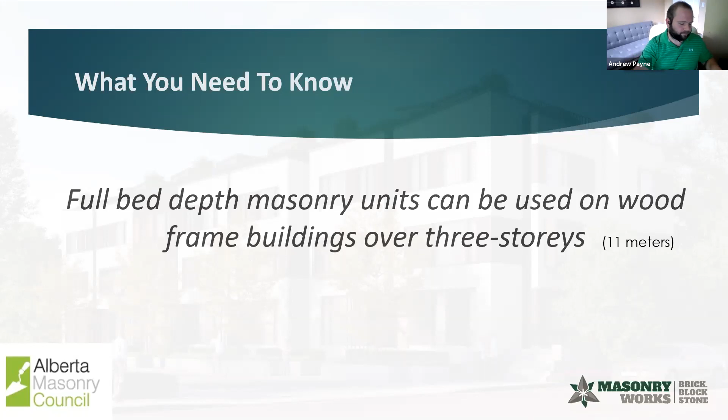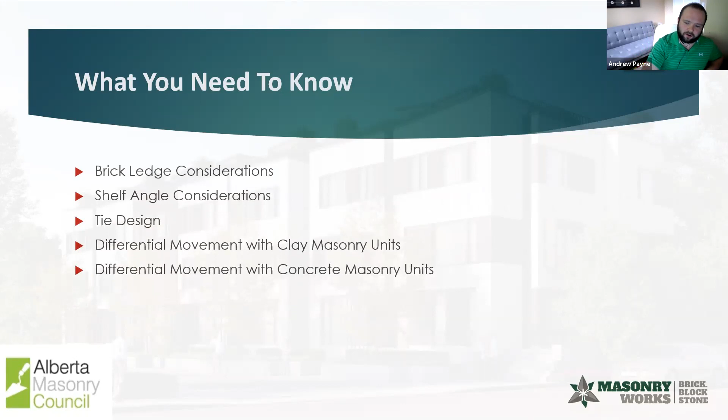In this presentation, we're going to go over the brick ledge considerations you need to know, shelf angle considerations, tie design, differential movement with clay masonry units, and differential movement with concrete masonry units. That's it. So we'll start off with brick ledge considerations.

Depending on what part of the country you're in, you may or may not see this as a common construction practice in your area. I know here in Ontario, we use brick ledges quite a lot—that's the common practice. You can see here a picture of a brick ledge, right at the foundation. I know in Western Canada that's not so much a common practice; it's more shelf angles at the foundation, but we'll talk about that as we go through the presentation.

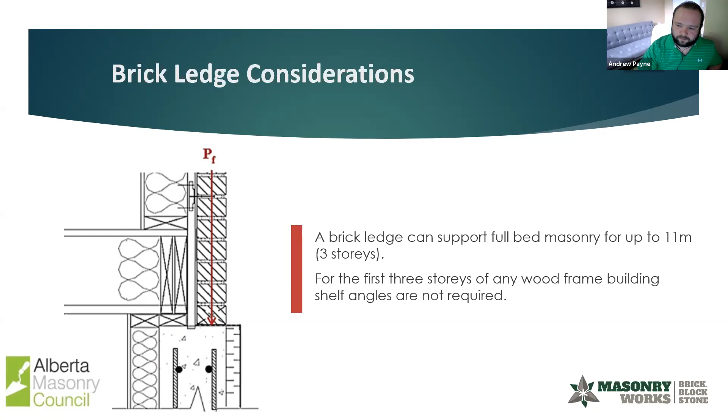If there is no concrete brick ledge, masonry can be supported by the shelf angle at the foundation level. The shelf angle is anchored into the concrete foundation, and then it goes up. If this method is used, a shelf angle is required at each story above the 3rd to support the masonry load and isolate differential movement.

The good thing about this method is it allows for continuous insulation below grade, below the foundation, to come through. Depending on what part of the country you're in and the energy codes you're subject to, this may be the method you have to use to meet NECB 2017 specifications. With a concrete brick ledge on the foundation, unfortunately, we don't have a way to have continuous insulation through that.

But in Ontario here, we're still on the NECB 2011, so we don't have to worry about that, at least in the status quo, but we know that's going to be changing. If you are watching from Ontario, make sure you are paying attention to the shelf angle at the foundation, because that could be coming down the pipe pretty soon.

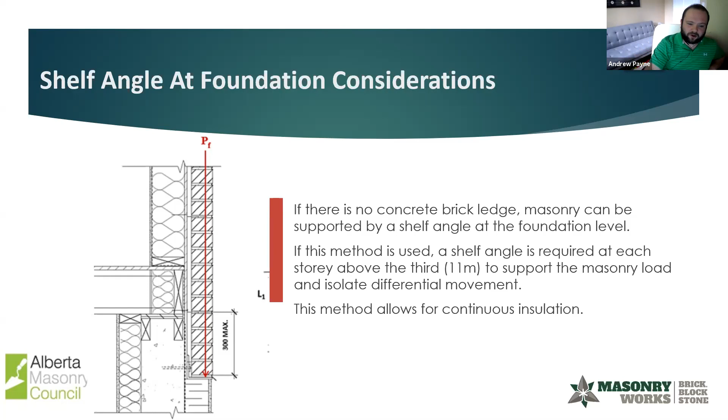The continuous insulation at the foundation kind of looks like this. I've got a clearer one here. This is continuous insulation at the foundation with a shelf angle, and it's consistent with NECB 2011. The only difference between the NECB 2011 and 2017 drawing is that insulation would continue below the foundation and below the shelf angle. Having that shelf angle allows that to happen. Out in Alberta, that's how they're going to be building on a go-forward basis.

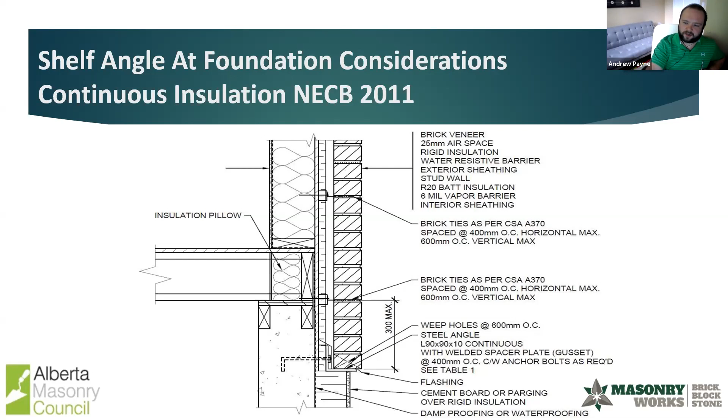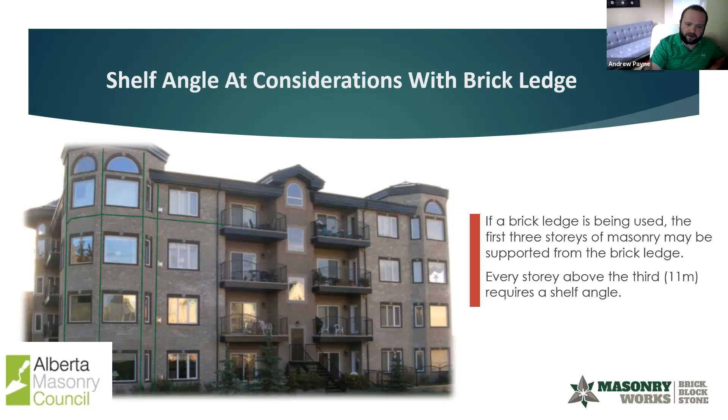Above the 3rd story, a shelf angle would be placed, and we'll get into movement joints later in the presentation. The shelf angle would be at the top of the 3rd story, supporting the 4th story. After that, every floor up to the 6th floor, to the maximum height you can go, requires a shelf angle. The spacing of the joints does change a bit after that, but just keep in mind, if there is a brick ledge, you can go the first 3 stories.

If a brick ledge is being used, the first 3 stories of masonry may be supported off of that ledge. Every story above the 3rd requires a shelf angle. This is a recap of how the drawing should look for a shelf angle supporting the 4th floor. You can see in this drawing that it's a through bolt supporting the shelf angle.

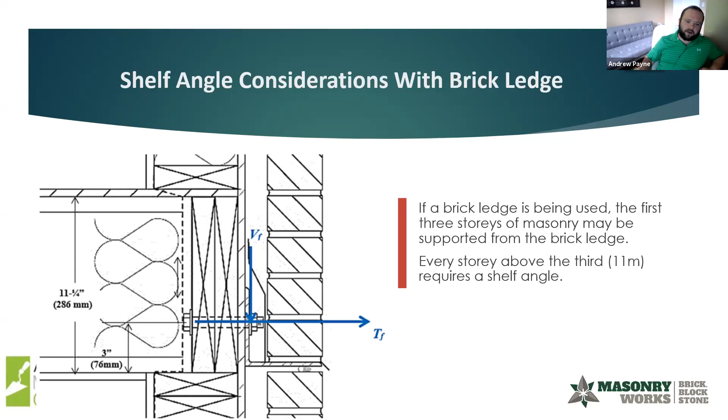We are currently looking into whether or not a lag screw can be used instead of a through bolt, for a couple of reasons. Using a through bolt involves the mason going inside to put that bolt through. Also, that creates a pretty substantial thermal bridge, whereas a lag screw going into the wood would create more of a thermal break, which would be better for the energy requirements we're going to be seeing coming.

So we are doing that testing. The Masonry Works, the Alberta Masonry Council, and the Clay Brick Association Canada are doing testing on the strength and thermal properties of both a lag screw and a through bolt. Maybe that's going to be another webinar series once we get that research done - we are in the first stages of it now. However, given everything that's going on, a lot of the research at the universities has been slowed down substantially.

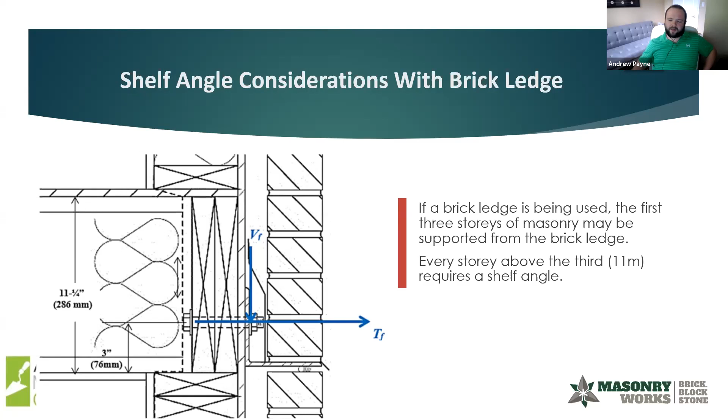So here's just what it would look like with the cavity insulation. So brick on wood with the cavity insulation, you can see each of the details here, and that's with a wood backup as well.

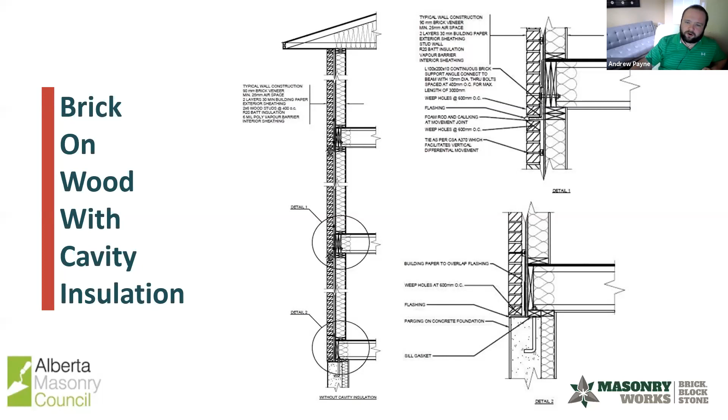So tie design. This is a very important thing to consider, mostly because of differential movement, but there is also a difference in rigidity between wood backup wall and masonry. Can I just ask everyone to throw themselves on mute if you're not talking? I'm getting a little bit of background here. So perfect, thank you.

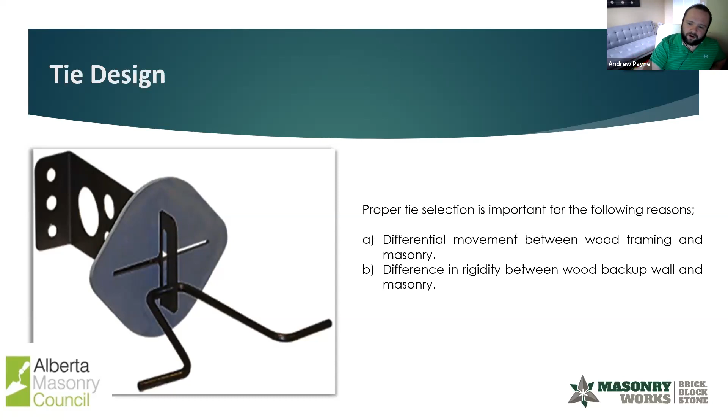So yeah, there's a difference in rigidity between wood backup wall and masonry as well. We'll talk here a little bit about the tie design, the tie spacing, a little bit about the properties of wood, why it moves the way it does, and same with clay brick and concrete masonry units for the exterior. So this would be your typical tie spacing for an SPF wood stud wall. You can see it here. Again, these diagrams, these drawings are available on the Alberta Masonry Council website.

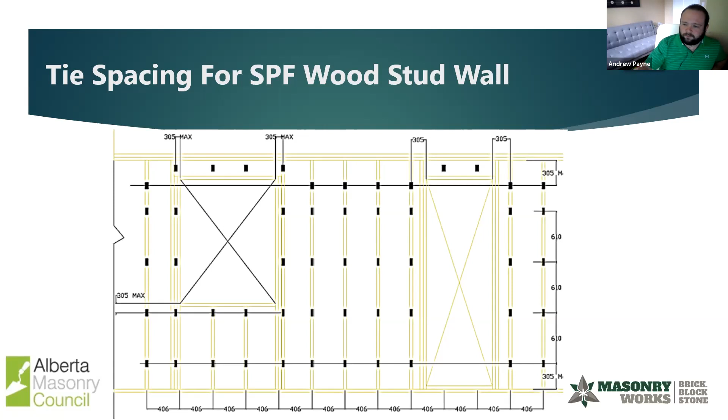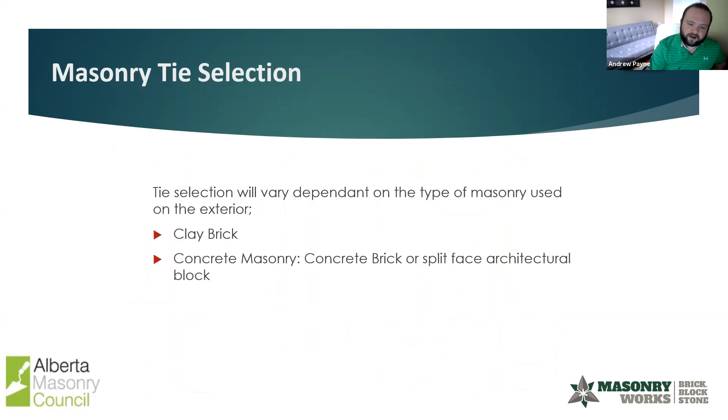So tie selection varies dependent on the type of masonry used on the exterior. So clay brick, there's certain considerations that need to be taken in place versus concrete masonry - concrete brick, split face or architectural block. Now the tie selection itself doesn't really change, but the way that the tie itself works does vary dependent on the exterior cladding that you're putting on.

So we'll talk a little bit about differential movement. It occurs when independent structural components are joined at different parts of the building. Prescriptive building code provisions have evolved and provide more generous height limits for veneer construction over wood frame. The 2015 building code allows us to go 6 stories now. So the use of brick veneer over wood frame construction on buildings of 3 to 4 stories is now in compliance, obviously up to 6 as well.

So with veneer heights often exceeding 40 feet, specifiers should keep in mind these types of structures require special attention and detailing to avoid problems that are caused by vertical movement between clay brick and wood frame. So we'll get into that.

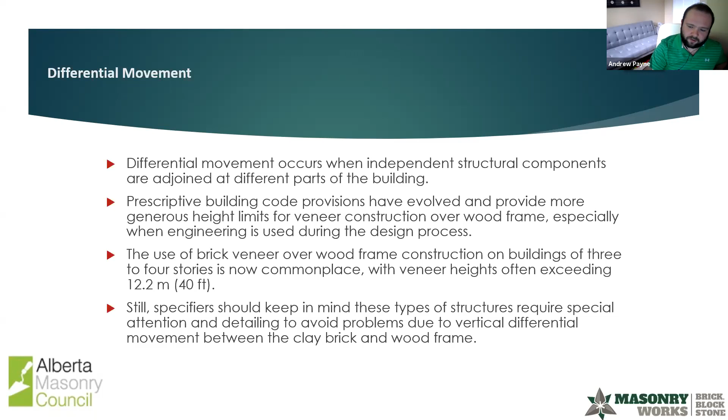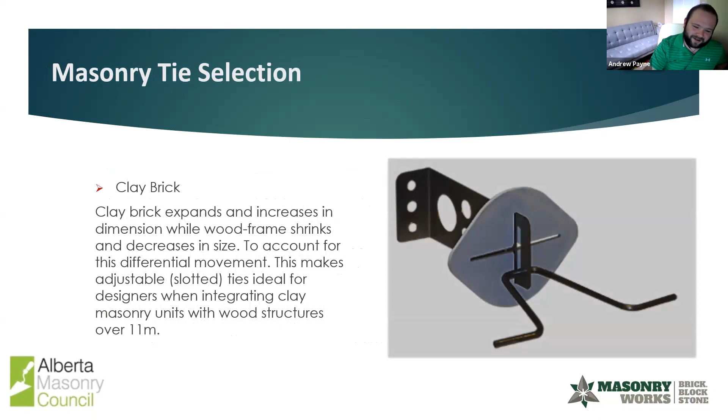So clay brick itself expands and increases in dimension while the wood frame shrinks and decreases in size. To account for this differential movement, the tie selection is important, and we recommend that you have to use slotted ties to account for this movement. So we can see here that each floor, the clay brick will expand. On 4 floors there, it expands almost a quarter of an inch.

So wood itself shrinks. This is the Canadian Wood Council shrinkage calculation here, and this can all be accessed at the Canadian Wood Council site - there is a calculator there. But we can see here that the shrinkage for wood over 4 floors is over an inch. So you've got the brick expanding and the wood shrinking by more than an inch, which is obviously going to cause substantial differential movement. That's why the tie is important.

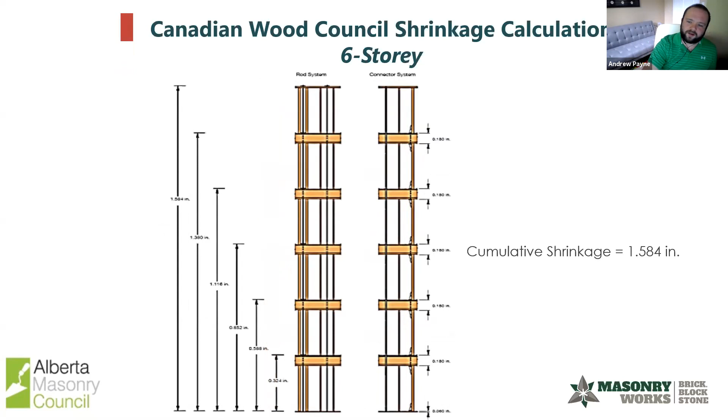And then obviously on six stories, the wood shrinks even more - it's over an inch and a half on 6 stories. So just knowing this and taking this into consideration when these buildings are being specified is really important for the detailing, so our masonry wall system doesn't fail.

So wood moisture and shrinkage. The wood contains a trace of moisture, which plays a key part in determining how strong and how dense the wood is. Even the most highly treated wood still retains moisture, and exposure to heat, as well as changes in the moisture content of the surrounding environment, can prompt adverse reactions that precipitate shrinkage.

Obviously this is dependent on the climate that you're in. The Ontario climate, for example, is a little bit more humid than the Alberta climate here in Canada. Alberta is really dry. Same with British Columbia, which is quite moist as well. So wood reacts differently in different climate zones, but we know that it still has to be accounted for.

Timber itself is what's known as hygroscopic, so that means it absorbs water. Obviously, a tree is a plant and it wants to absorb water, so it continues to do that even once it's in your wall. So timber exposed to an excessively dry or cold climate can release exorbitant amounts of moisture, leading to shrinkage.

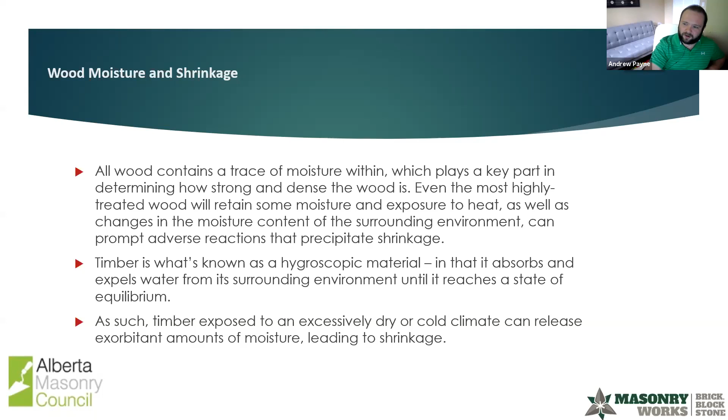Wood prefers dry conditions. When the temperature is between 0 and 40 degrees Celsius and the wood moisture content remains high for an extended period of time, wood will start to get moldy. That's something we know, and we've seen a lot of cases of that, particularly in Western Canada, where they started building with wood a little bit sooner than we have out here in the East. Once the relative humidity exceeds 90% under these conditions, wood will start to rot. However, in sub-zero temperatures, even high humidity won't be a problem because it's too cold for mold and fungus to grow.

Given that there are such risk factors with wood and moisture, brick is a good option for managing this moisture on these frame buildings. The combination of materials can make for safe and durable buildings if the property or the building is detailed properly.

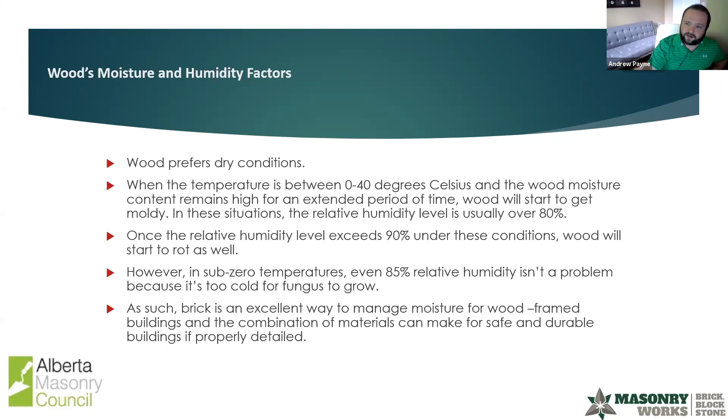This leads us to masonry tie selection for concrete masonry. Concrete masonry, such as concrete brick or split face architectural concrete block, does shrink over time. However, the wood frame shrinkage is greater than the shrinkage we'll see in a concrete masonry unit on the exterior, so we still need to account for differential movement.

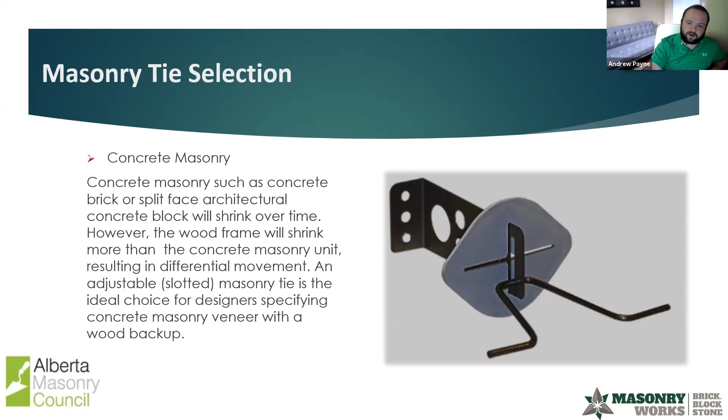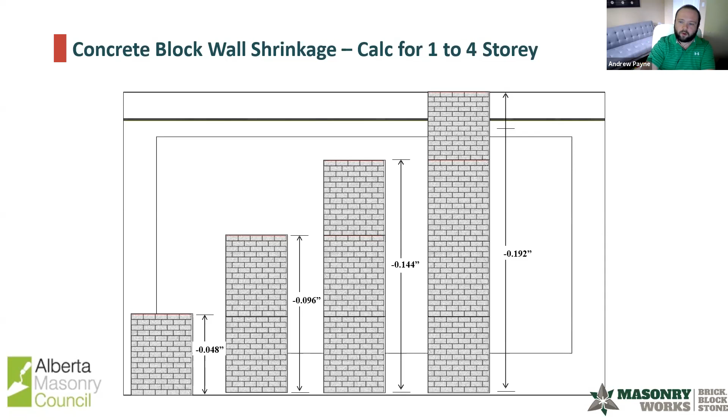So your tie options, the ones that we know of that are on the market, are the adjustable BLOK-LOK V-tie and the adjustable Fero V-tie. Either one of those will do the job.

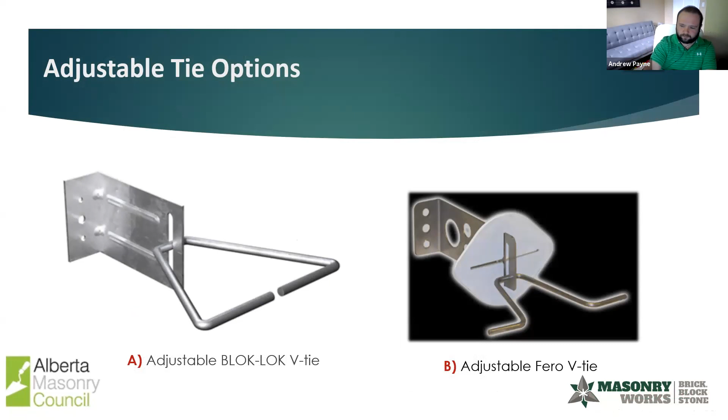In terms of movement joints, to manage differential movement, the appropriate size and spacing is very important, particularly with the amount of movement we'll be seeing. The movement joint specifications will vary depending on the number of shelf angles used and whether or not you've got a brick ledge at the foundation.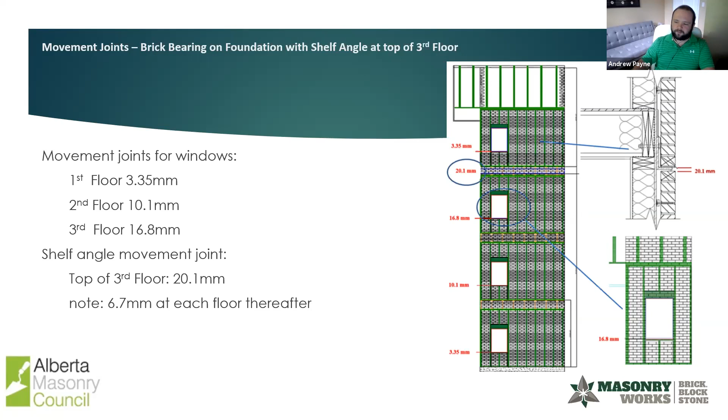If you're putting a shelf angle at each floor, as you can see here where the shelf angles would be, it's a little bit less complicated, a little bit more uniform. So there's the drawing there, but you can see the shelf angle minimum spacing is 6.7 millimeters, though it's generally specified as 10, which is fine. And then the windows are 3.55 millimeters. Because the movement is isolated by the shelf angle at each floor, that's why you just remain consistent on the spacing of the movement joints.

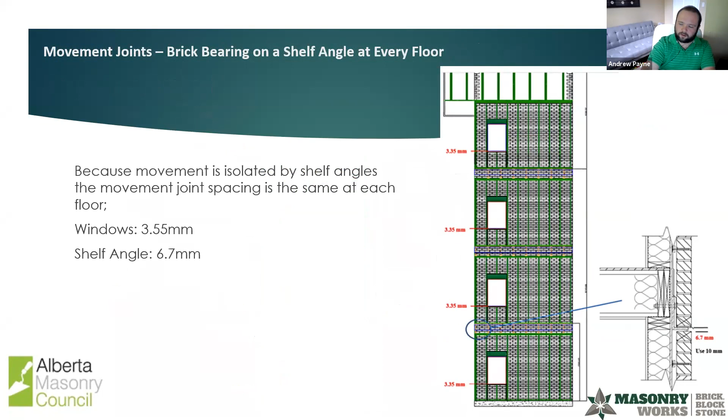So some additional resources, if you want to access some of this information: we have technical aids available on our website with more of the engineering behind this and how it works. Our site, masonryworks.ca, has the technical aids posted there. The Alberta Masonry Council also has them, along with a lot of the drawings we saw in this presentation. There's also the dimensional calculators from the Canadian Wood Council, and for information on ties you can go to strongtie.com, where they've got all the calculations for wood shrinkage.